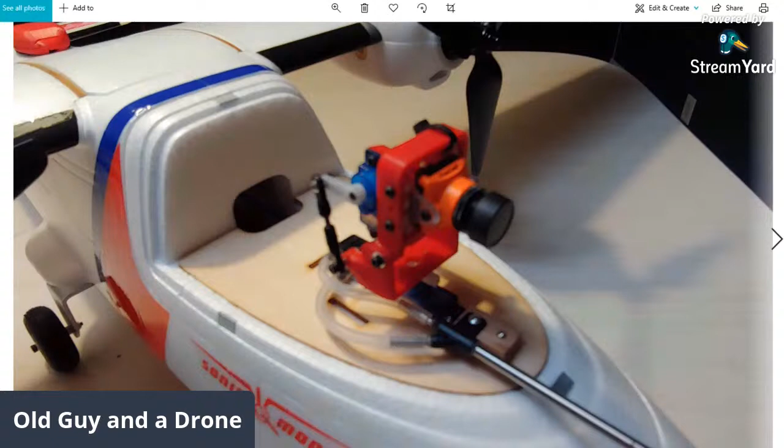There's the camera, and the mount is a tilt and swivel mount that I 3D printed and got the files from Thingiverse, put up there by the channel Bonafide Pirate. He's the guy that kind of inspired me to build this airplane, and he came up with these things.

Now I do want to put a Caddx Tarsier in there, a dual camera that has an FPV camera on the bottom and a high def camera on top. I had one, and it wasn't working, so I had to RMA it, and of course they're out of stock, so I'm waiting for that and I'll swap it out when I get it back. That uses a little different mount because it has some circuit boards that go with it, with the DVR and the SD card holder, and that'll just hang behind the camera. It'll be very easy to replace because the whole thing just plugs in with servo-style connectors into a harness that comes underneath that canopy, which needs to be removable.

I'll show you some of these things. We're going to fire up the airplane and get all the servos working. At that point I hadn't covered up the servos in the rear yet, but I have since done that.

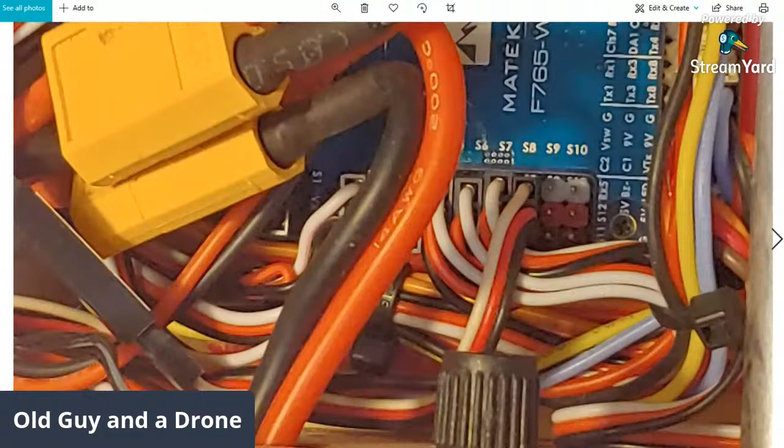But these are some of the wiring. If you look at the blue flight controller board, you see S6, S7, S8, S9, S10 — those are different control channels on the flight controller that you then map to the different servos that go out. There's also 4 servos plugged into the receiver, as well as a bunch of wires plugged into the controller, because you've got so many different channels.

You have about 4 or 5 different control channels for the different flight modes and arming, and you have pan and tilt channels on the camera. You need a channel to work the lights, flaps, aileron, elevators. It's probably got a grand total of about 13 or 14 channels used of the 16 available. So, a lot of wiring.

This is underneath the canopy, the little harness that runs to the camera. You see one of the things says tilt on it, and there's plugs and connectors for everything, so I can take that off if I really have to. Then you just lay the canopy with the camera up on top of the wing while you deal with the battery and everything else.

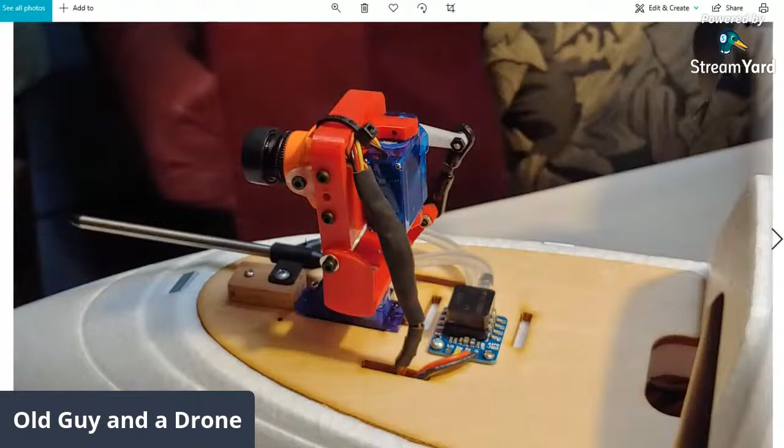There's another shot of the camera from the other side. That thing behind the camera, the little black square sitting on the circuit board, is a pitot, an airspeed sensor.

You see the pitot tube sticking out the front there in front of the camera. I thought that might be the best place to mount it on the airplane, because it's sticking out in the airflow. I thought about the wing sticking out the side of the fuselage, but that seemed to be the simplest place to put it.

You see the rubber air tubes go from the pitot tube on back to the sensor, which then has 3 wires, power and signal, that go back to the flight controller, and it works really cool. I fire up the monitor of the on-screen display and blow in front of the airplane, and you can see it says I'm doing about 15 miles an hour, which is pretty cool, sitting still. Maybe if I was more of a blowhard, I could go 20 or 30 miles an hour, but I was checking to see if it works.

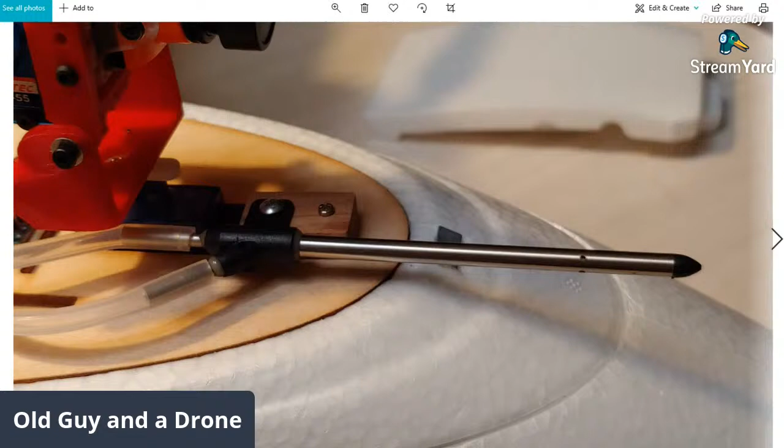I think we're back. Yeah, there's the pitot tube. And you see up near the tip, there's a tiny little hole in the side, and that's the static port. I don't know how many of you know how a pitot tube works, but it's pitot and static, and that's why you have 2 hoses coming off the back of it. You have a static and pitot, and the pitot side, the pressure side, is a hole in the front of the pitot tube, and then those little holes around the side are the static, and between the 2 of them they can measure the difference and measure the airspeed.

Looks like a Christmas tree. The light that's blinking on the GPS back there, that actually shows through the red 3D printed housing, tells you that you actually have a 3D fix, a satellite lock on enough satellites to get a precision enough fix to use the autopilot and return to home on this thing. There's a little light on the pitot tube sensor.

At any rate, that's what it looked like. Lightened up my studio last night. My studio / workshop.

Okay, a lot of wires. Oh man, there are a lot of wires.

Video is good. Never lost signal, but I do keep losing audio. It keeps popping in and out. Maybe on my end. Are you talking about my audio on the stream here? Bob, is anybody else having a problem hearing me? It might be that fan blowing on me, but if you do, let me know. It may be this plug that's in this wireless mic. Let me make sure it's plugged in okay. Appears to be. Let me know if it's still a problem. I've got another mic here, but it's not wireless. It's not going to move around with me.

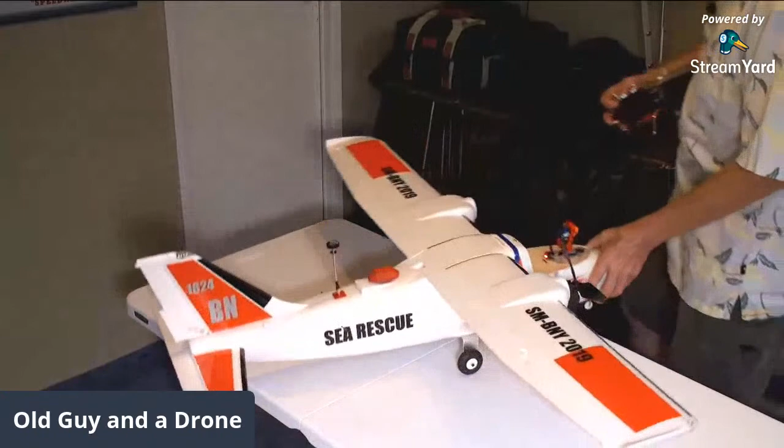It has, of course, all the standard controls. Elevator, you can see on the back. Ailerons on the wings. I don't know if you can see the flaps, but let me spin this around so you can see the back of the airplane. It's got flaps on the wings, 2 notches of flaps. There's your aileron, rudder on the back, and it's got a steerable nose wheel coupled to the rudder as well.

And if I arm it and hit the throttle, you hear the motor spin up. Of course, the props aren't hooked up. So that's the model right there, and it came out pretty nice looking.

I mean, underneath, you can see those 3D printed ventilation covers, those red covers right here, that I printed up and mounted for the ESCs to help keep them cool.

All the wiring for the lights runs in channels all along the wing and through the bottom of the nacelle, and then it goes around through here, and it all goes into there. There's a little black mark, you can't see it there, but this is where the center of gravity is. And you achieve the center of gravity by moving the battery - it can slide all the way back underneath the equipment bay if it has to, if you use a big battery.

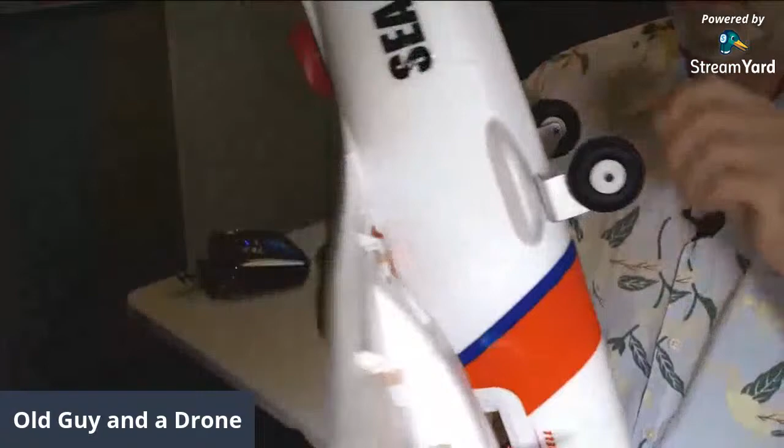Down on the bottom, it's got another one of those magnetic hatches, and in there is the actual receiver and the video transmitter on the side there. So that's in there, and then in the top part here is where you saw the photograph, where the flight controller and all the electronics and everything else was. And it's just solid wires. But it was a fun project.

And the next thing I want to do right now is hook it up to the computer, and that's done by plugging a serial micro USB cable into the flight controller.

Okay, I'm going to open up INAV.

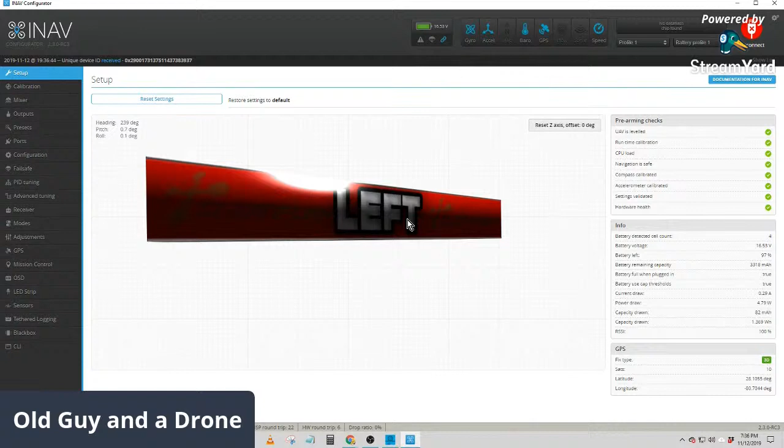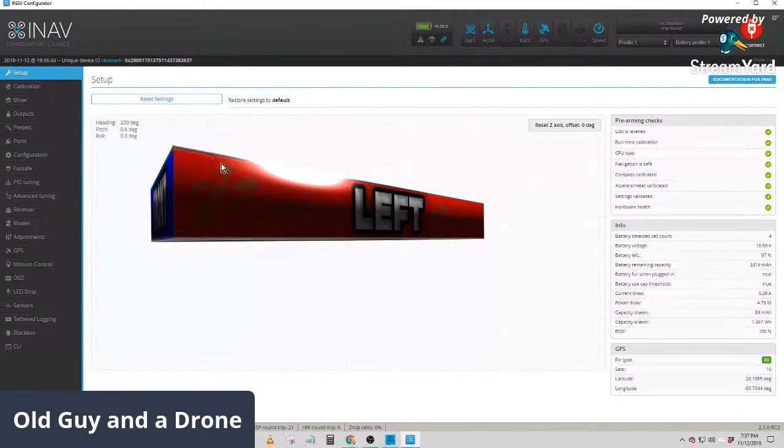And as I move the airplane around, it turns it around, and if I lift it up it tilts. The first thing you do is make sure that everything's moving in the right direction when you first plug the flight controller in. And then once you got that moving correctly, there's a whole checklist of stuff down the right here: UAV is leveled, runtime calibration, CPU load, all the different steps that it took to boot up. And I got a whole bunch of green arrows, so evidently that's okay right now.

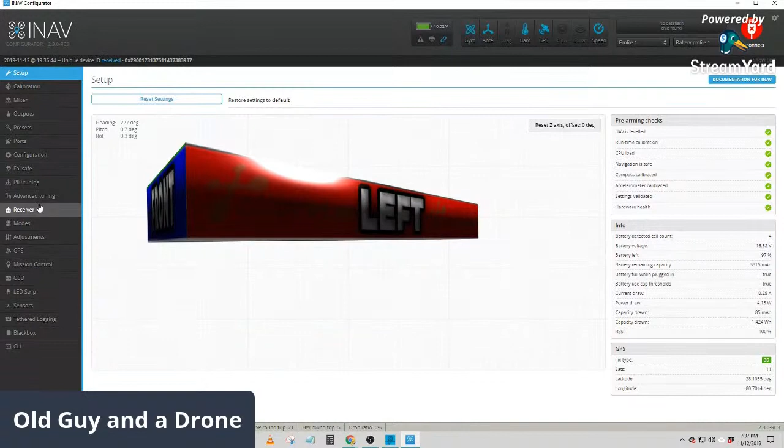And over here on the left-hand side are all the different pages and different things that you can do with INAV. Now the radio itself is not a real big part in the setup of this thing, because INAV will fly the airplane for you, unless you got something set up where something's reversed. So the basic radio setup on your basic 4 flight channels - throttle, rudder, aileron, and elevator - need to be just straight out of the box.

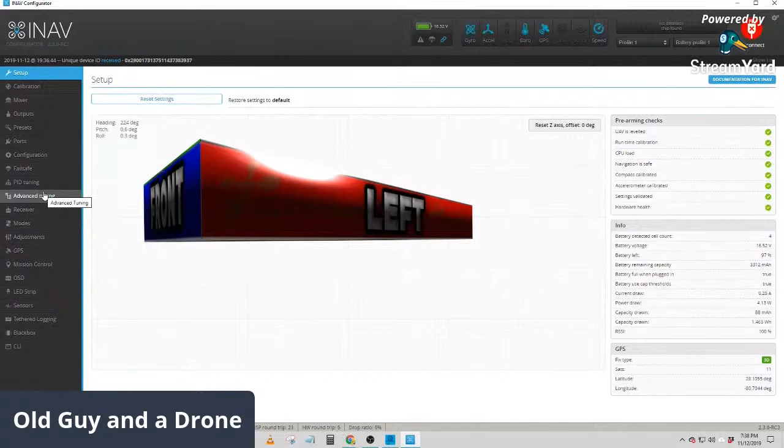And we'll talk about that when we get down to the receiver tab. But anyway, the first step when you plug in this flight controller is to calibrate it. And I did this outside of the airplane.

Unlike the accelerometer calibration in a drone where you just do it one shot, this has got 6 different ways that it needs to know: right side up, upside down, and on each of the 4 sides. As you do it, it processes it and turns these things blue and tells you that your calibration succeeded, and that's all there is to that page.

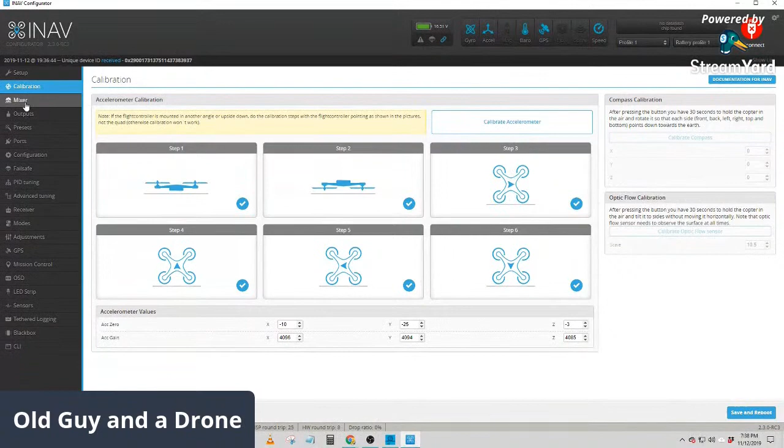Then you go on to the next step. The next step is probably the trickiest step in setting up INAV, and that's where it decides what servos get their directions from what radio channels, and on what pins on the flight controller board does that signal get outputted to.

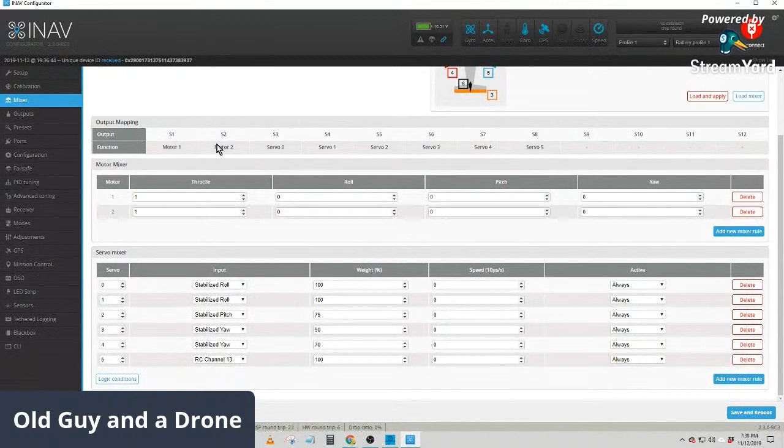There is a way that you can just tell it it's an airplane and say load and apply, but I have a more complicated setup than just the basic airplane because I've got the camera controls in there, I've got the flaps, I've got all kinds of other things. So I did this manually. It has 2 sections: a motor mixer and a servo mixer.

Inactivity alarm. That's my radio saying I haven't done anything in a while.

That's pretty handy actually, because I'd be working in here and forget to turn the radio off, and I'd be in the other room and I hear some woman in here yelling something about inactivity, and I don't have to even take that personally, not being married, you know. I mean, if you've got women yelling inactivity at you, that's a problem. But this one, I could just shut her off.

Okay, so anyway, this page - I'm not going to give you a lesson on how to do this, but basically I have 6 different servos or channels I need to deal with: the 3 basic controls of the airplane, roll, pitch, and yaw. The throttle is handled separately, and then I needed one more channel going through the flight controller to control the lighting control box.

So I set up a channel on my transmitter, just channel 13.

Holy shit, you guys are talking about the temperatures. This is why I live in Florida. But it's going to be windy. We got that cold front that's killed all of you coming here in a day or so. So we're going to get it, and this one isn't going to stall out like all the other ones have so far. We're ready for the first blast through here.

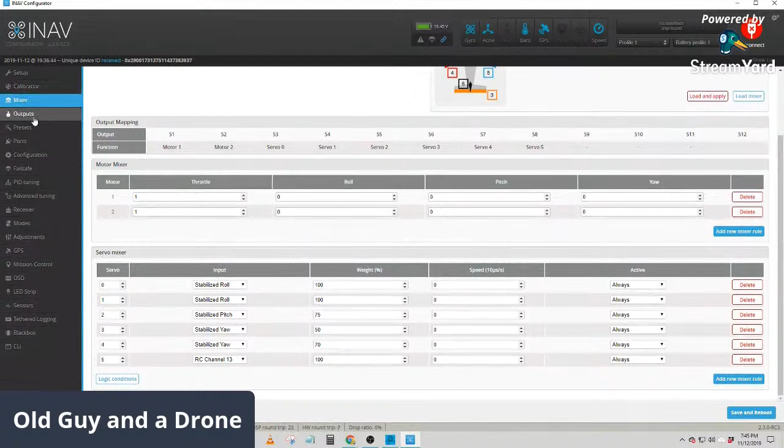Then you can verify in the next tab once you have your mixer set up. You go to outputs, and what this tab does is it'll actually show you what every one of these channels is doing. So if I move the ailerons, you can see the output.

And what happened was, even though we'll get to the radio setup in a minute, even though the radio was set up right, the aileron servos were moving backwards, which is easy to happen because they can mount this way or mount upside down, and both the aileron servos were moving in the wrong direction.

Now the inclination is to go into the radio and reverse it, but you can't do that because then your INAV will be all screwed up. You make all your changes in INAV, and there's a button over here that says reverse. So I reversed both of the aileron servos, and now when I move it, the servos move in the right direction. Then elevator, I didn't have to reverse that.

That one was okay. The rudder I had to reverse, but the nose wheel I didn't. So this one here, servo 3, is the rudder. Servo 4 is the nose wheel. So I had the rudder go one way, the nose wheel going the other way, so I had to reverse it, and the final upshot is everything is working in the right direction now.

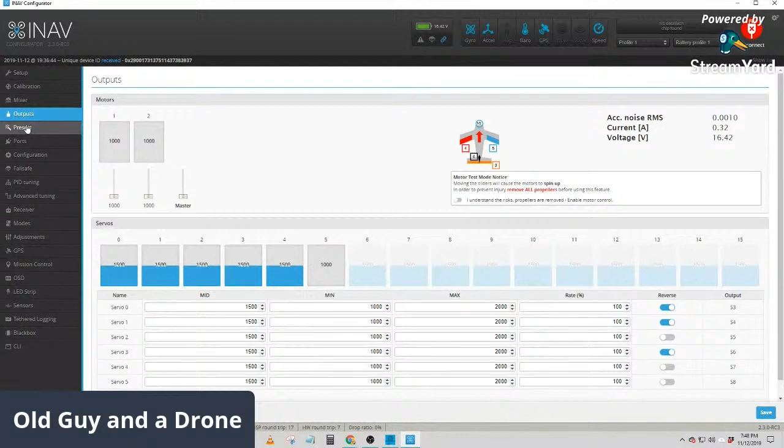INAV also has PIDs, just like Betaflight, because it is a servo mechanism and it has PID loops. It has just as many settings, and it has filtering and all that other stuff.

They give you a head start here with this tab called presets. Basically, you just tell it what you've got here - a 5-inch racer, 7-inch indoor, 7-inch freestyle, 10-inch airplane general. Then you hit apply, and it sets the PIDs to where the developers think is a good start, a good close.

Seek split, how you doing my friend? It says, what's that website? No, that's not a website. If you're looking at what's on my screen, that's the INAV configurator to configure the flight controller on this airplane sitting behind me, that I can turn the lights on. I think my favorite thing about this are the lights. I've always been a gadget nut.

All right, where were we? So is this like watching paint dry, guys? Am I losing you, or are you still here? No, we still got a half a dozen people. Well, let me get through this.

So I set it to general airplane, and we'll see how that works. The next thing, just like Betaflight, is that all these different peripherals and everything have to hook up to the flight controller board - your receiver, your GPS module, your airspeed... not your airspeed, actually, that goes through a channel in the radio.

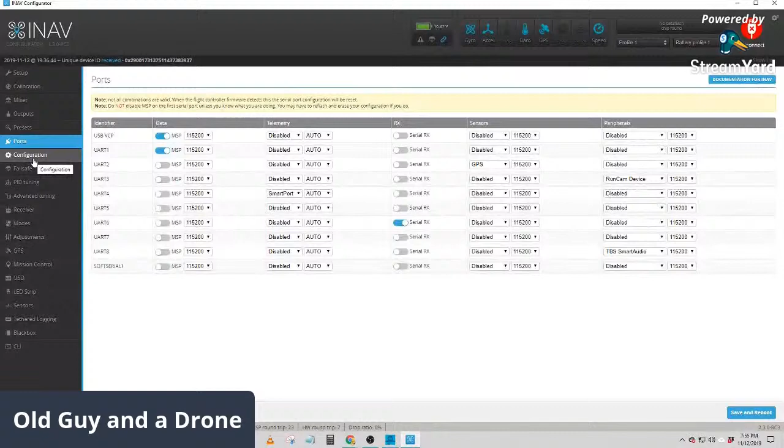So that I did follow all that, anyway, that could be a little confusing, but got all that done. The next tab here is configuration, and I don't want to go through all of this stuff, but just showing you how complex this is, and I have got to go over this before I fly the airplane with the flight controller involved.

Every single one of these things, I need to make sure I understand what they do. Now you have fail-safe in this thing. This thing has return to home, and it'll fly back to the home point, and then it'll fly a circle, they call it loiter. So fail-safe is when the airplane loses the signal from your radio, if you fly it out of range or something fails. This thing is smart enough to turn around and fly home. Hopefully you'll get your signal back, but eventually it'll just run out of battery, and it's designed to try as hard as it can to land, maintaining a certain glide path rather than crashing down. You could glide into a tree, but chances are, as soon as the airplane gets a little closer to you, you get your signal back.

Now this has got a long-range R9 FrSky system in it, which should be good for over 10 kilometers, so I'm more than likely going to lose the video to the goggles long before I'd ever lose the signal controlling the airplane. If that happens and you're flying a couple miles out and can't see anymore, you just click the switch on your radio set to return to home mode, and the airplane will fly back. As it's coming back, you'll probably get your goggles back. And if you don't, you'll see the airplane flying circles over your head. You just turn off the autopilot and land it.

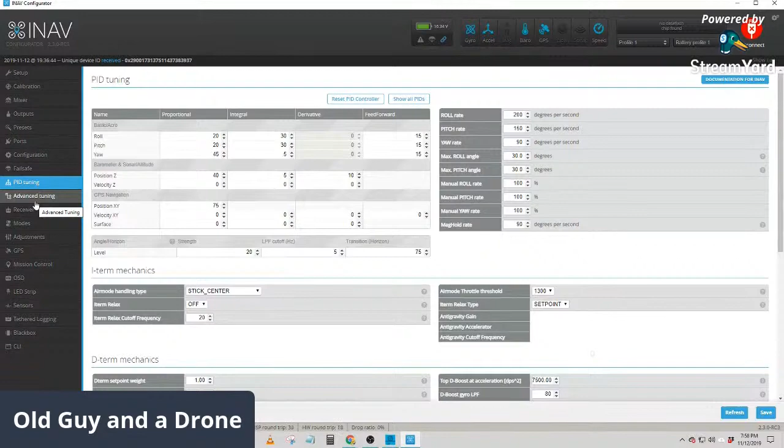All right, so this, you set your fail-safe up here. This is your PID tuning, which is like Betaflight. Then they have an advanced tuning page, and all these other settings where you set return to home altitude, and everything is in centimeters, which makes it really great. So 3,000 centimeters is 30 meters, which is almost 100 feet. So climb before return to home, I have that turned on.

Land after return to home, only on fail-safe. That means if I lose the receiver signal, it will try to glide in somewhere, and then after it stops, it will shut the motors off. They have a vertical speed, all these different settings, and I have to fine tune all that as well. You've got all kinds of throttle settings.

I mean, you could tune this thing till the cows come home, but you got to have a starting place. So we'll do that. Then the receiver tab is basically just like Betaflight. You got to make sure that when you push the throttle up, it goes up. When you move the rudder to the right, it goes to the right. When you push the elevator forward, it goes up. When you push the aileron to the right, it goes up. You can't have any of these things reversed. They have to work just like that.

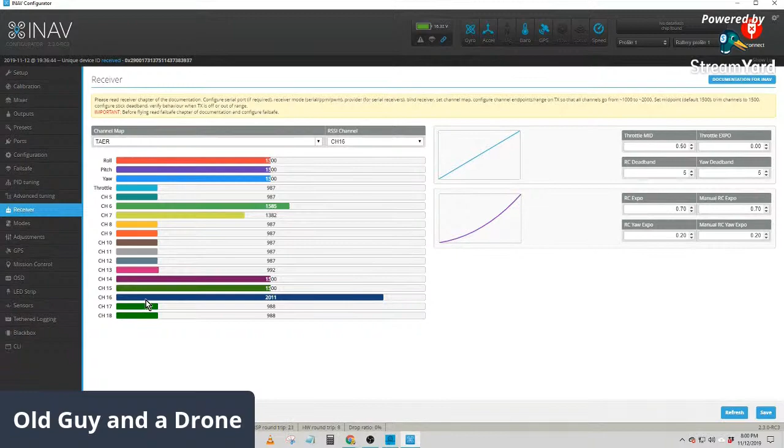All the rest of these things are just different switches. Here's the, I told you on channel 13, that purple one there is where I set for the light control. So when I move the light control, you see channel 13 moves. So the first thing you do when you're setting it up is you pick a radio channel and you go into the mixer, you assign a particular switch to that channel. Then you go into the flight controller, create a servo, assign what I went through before. So it's a process that requires that you keep track of what you're doing, and I did that. I have a listing here of everything, what it's mapped to, what it ended up on, what pin it is, and all that.

And then I actually drew a diagram, because there's so many switches on this radio, and until I really become familiar with what they all do, I even made myself a diagram of what switches do what. Now I've tried to conform to the same standards I use for the drone. In other words, this is the arm switch here, this is the main mode switch here, but I've got secondary mode switches for altitude hold, course lock, all that. I have auto tune, I have many other functions that you don't have with drones.

So I do remember the basics, and if something should happen, I know that if I push this switch up all the way, it's going to put me back in manual or pass-through mode, not just fly the airplane. All else fails, click that. I know if I pull this switch down all the way, and I may change it to make the mode switch down all the way, but it'll go into automatically return to home. So those are the most important things that I need to be able to get to without having to think too much.

And then after receiver tab is the old modes tab, and this is where you assign arming mode. You tell it what switch it is. And when I move that switch, this little blue thing moves, and I can move this to where I want it. So when it's inside of this range, it'll actually do that.

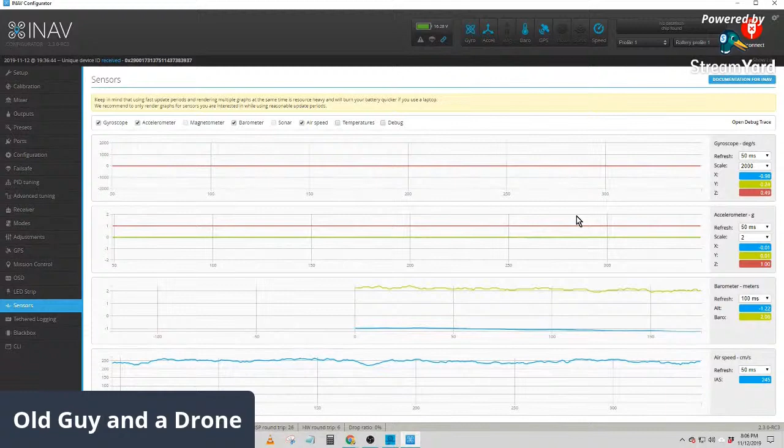This shows you your different sensor inputs. There's your barometer - if I were to go back and pick the airplane up 3 feet, this little line would go up. If I blow into the airspeed indicator, this one would change. You can see just the air moving in the room is fluctuating that one around. But this actually is a way to check to see if your sensors are working. And then it has black box logging and all that.

The CLI is a command line interface where you can type commands. You can see what commands you have, you know, just like Betaflight. If I say get GPS, it gets me all the...

Okay, it evidently lost my sensor while I did that. So...

At any rate, I think that's enough of that. It would probably take 3 or 4 hours to go through every one of those settings and have a discussion about it. I've been watching a lot of videos on YouTube, listening to some of these guys who are, you know, the Joshua Bardwell types that dive into every single little setting and possibility and all the different things and ramifications. One of the guys, a guy named Pawel Spychalski, I think is his name, is actually on the development team for INAV, and he gets very technical too.